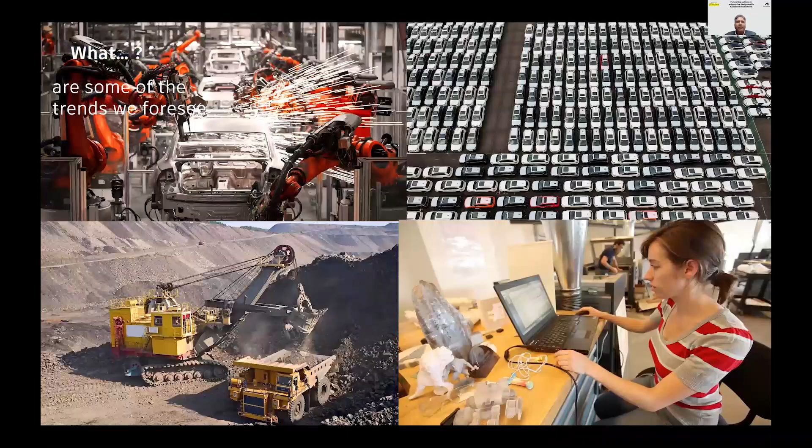So some of the whys will lead to some of the whats, the trends we foresee in the future. Climate change would lead to push for mitigation efforts. Governments around the globe are giving more incentives, providing tax sops to organizations and companies to make their employees buy electric vehicles, just to promote clean mobility. This is very important because the government is actually participating in ensuring that the population starts using vehicles which are not polluting.

A rise in urban population definitely would lead to a rise in consumption patterns. I discussed some of this in my previous talk, but I'd like to say that the desire to own a personal vehicle would continue, because more and more people would demand a personal vehicle, as for them it is like an expression of freedom and personality. So the desire for personal vehicles will remain.

Geopolitical factors are definitely very important, because every nation would like to stay ahead of the curve. They would like to own the solutions for clean mobility, because this is going to be very important going forward. But at the same time, it has the potential to create supply chain disruptions, which can also lead to many problems. But OEMs need to find ways to get around it.

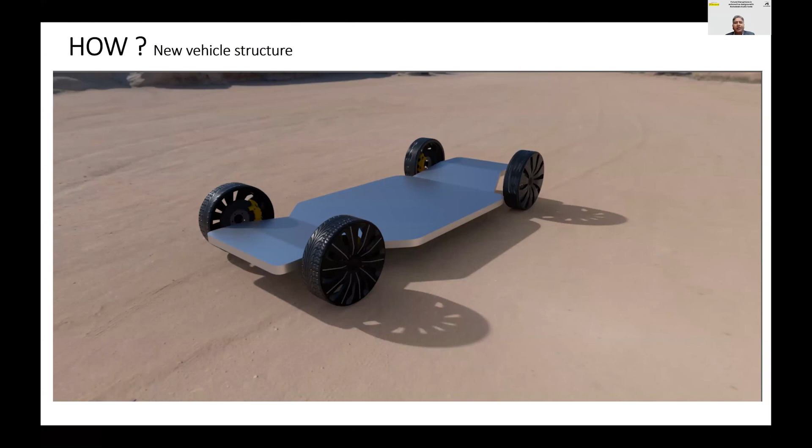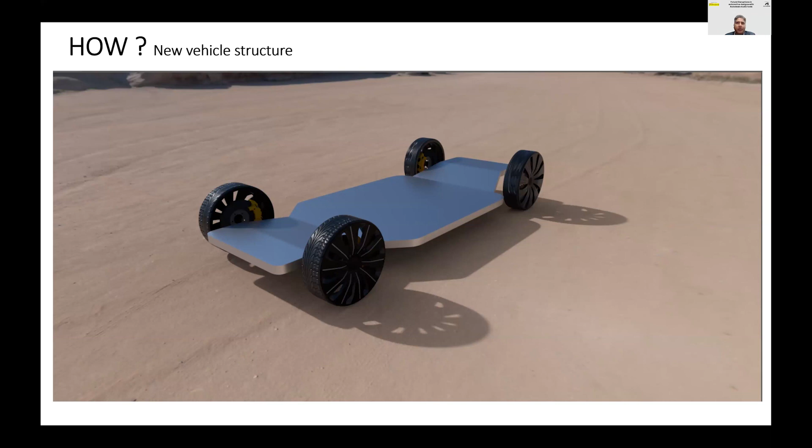Now the new electric motor gives a lot of room for designers to reinvent the shape and utilize the space available to them, because most components are thrown into the corners, which also gives a lot of room for interior space. So all the other elements like power transmission, cooling, fuel tank, and mechanical components have been removed because of this EV architecture, which gives a lot of opportunity.

So this is just an expression of how the vehicles could be, and this is not something that we are designing, but something that we just think is there. You can see that this vehicle has a lot of room. I'll just push forward.

With the new EV platforms, the number of mechanical components have been reduced, and most of the remaining components are pushed into the corners. This actually frees up a lot of space, gives more room inside, and reduces the vehicle footprint. This enables an opportunity for designers to focus on the interior as well.

Whatever electric vehicles are in the market now, and whatever will get launched in the near future, have very distinct aesthetic features, because OEMs themselves want to differentiate the EV from the ICE vehicle in the same family. Some trends we're seeing are very sharp corners, something futuristic, something akin to space shapes. Not exactly astronaut-related, but they want to excite consumers so they feel they're participating in something futuristic.

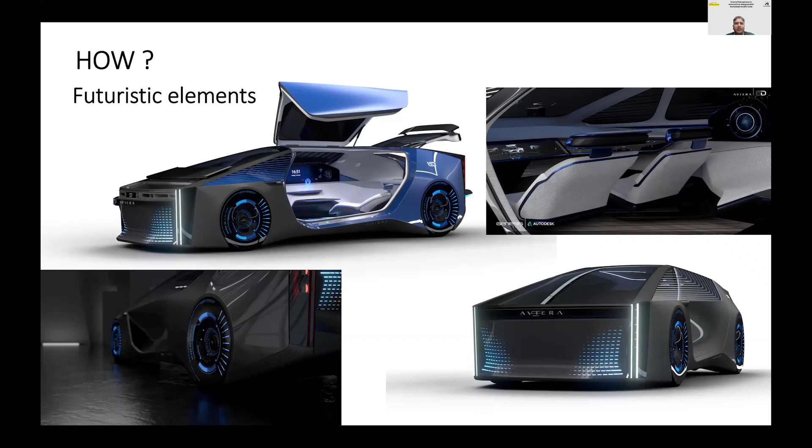Some examples, the same model but different angles, I've actually shared on this slide.

Another area where it's very obvious is that electric motors have very different cooling requirements compared to ICE based vehicles. So the space traditionally occupied by the radiator gets freed up. That's why in some of the new EVs coming out, the front has a bonnet but no engine, so you can actually put other things there.

There is a lot of creative ideas that could be explored. Also, since there is no grille, the front fascia becomes like a drawing board for designers. They can paint the picture like an open canvas, whatever they want, giving a very distinctive, futuristic look and feel to the electric vehicle at the front.

You could see some cars from the same family look very different because they have a very different front fascia and a very different look.

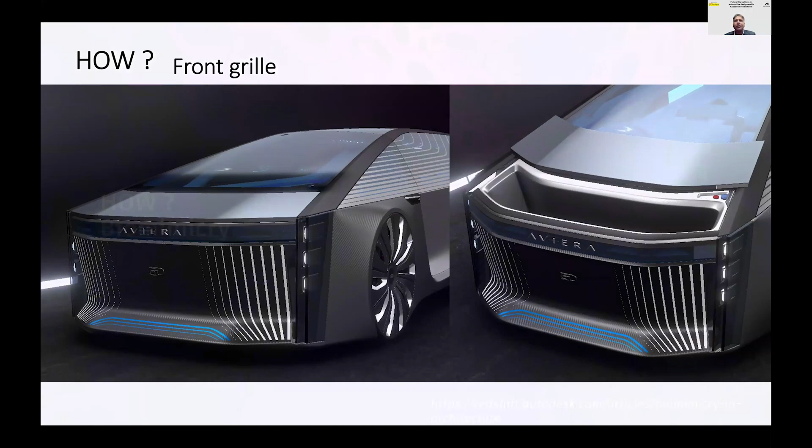As I mentioned in my initial fireside chat, the future would see tremendous resource scarcity because today we are consuming a lot of materials, elements, and stuff provided to us by Mother Earth. But these are finite things, and at some point we won't be able to access them because the resources would be depleted.

There could be a time where we need to find ways to sustain these mobility objects, and provide a lot of hope to others. In such times we need to ensure people consume vehicles in a manner which gives a lot of hope for the coming years.

In this context, we see that a lot of nature-inspired design would take center seat. Designers might include some natural design elements into their vehicle aesthetics.

This can happen through technology, which I'm going to discuss. This can help in multiple ways because it gives a very soothing, calming effect. At the same time, it's a way to respect Mother Nature and provide hope to others. But it also helps create differentiation and maintain the brand loyalty of loyal customers. So all these trends we can actually see going forward.

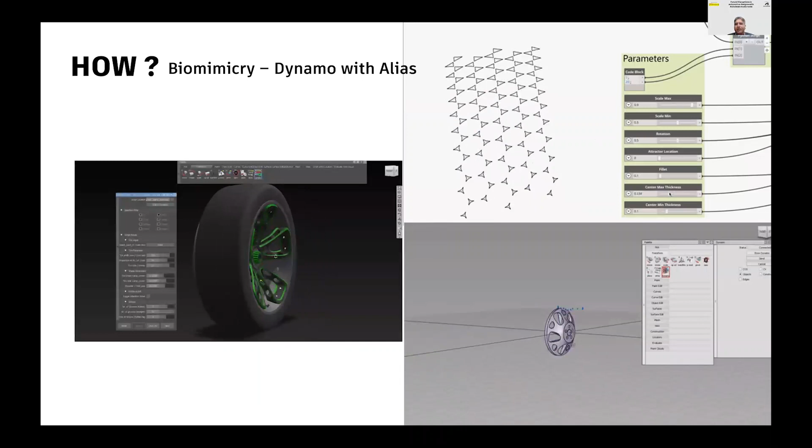There are certain technologies available within our tools, which is Alias, where complex designs could be achieved through the application of rule or algorithm. So it's not that you have to sit and design those patterns - those patterns will be given to the designers in the form of some algorithms or scripts, and those scripts can be called in while you are doing your vehicle design or surface design, enabling those parametric designs to be incorporated into your design.

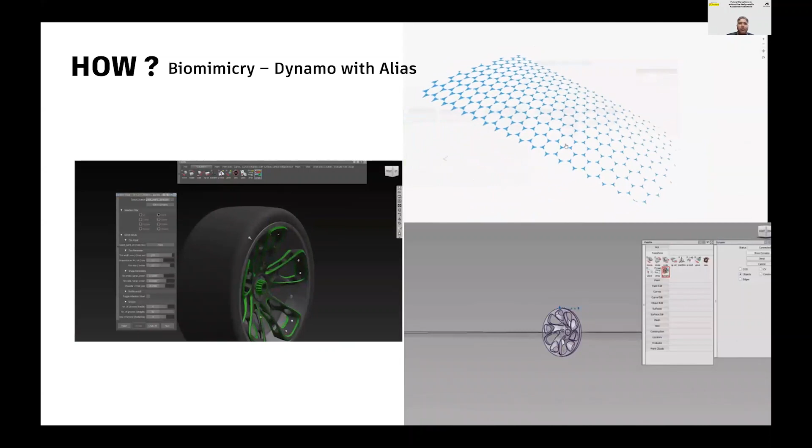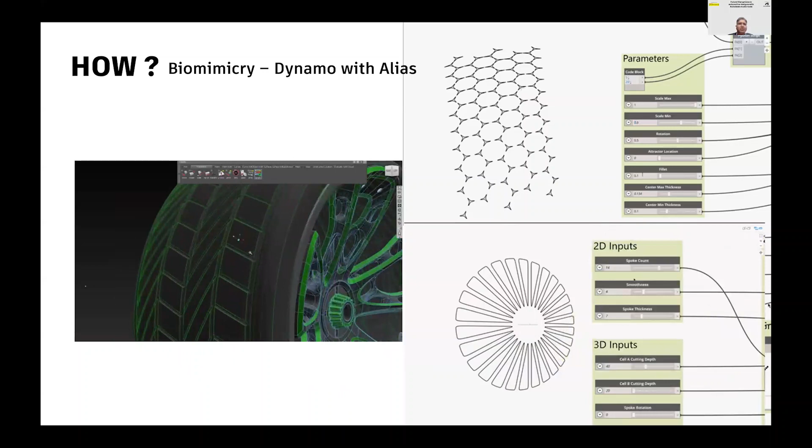So this tool which I've shown you is Dynamo, which is an open source visual programming tool, and it also works with other technologies from Autodesk, not just Alias. It's a computational design tool where designers can create scripts - or we don't expect designers to create scripts, because that's like someone else's job. Designers are more creative, so they can use or utilize scripts which are already written to create parametric design.

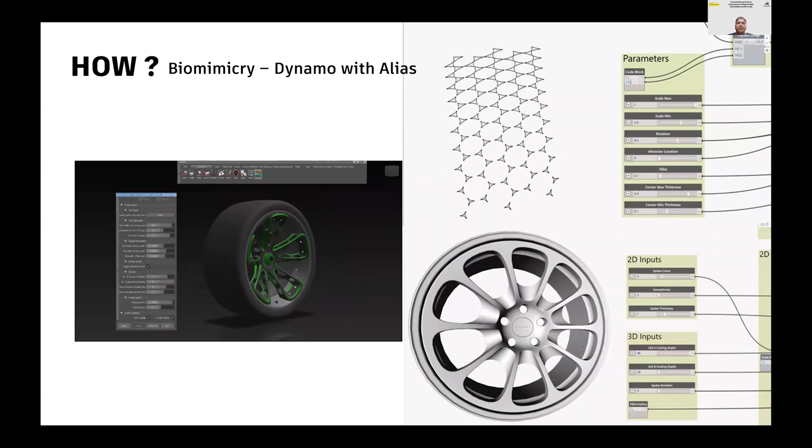Some of the very impactful designs have been created using this computational design technology.

And what we could also see, and this is one of the things we have already seen, is that too much technology can sometimes overwhelm the aesthetics of any mobility object. So if you just put a lot of technology, a lot of machines, a lot of components, many would think that it looks very mundane, very basic, and very simple.

But if you try to make it organic - the future might be that customers want to experience something which is very different, very organic, very chaotic. Sometimes we don't like chaos, but sometimes we like chaos because chaos can create some interest in your life. So at the same time, we ensure such designs could be there, but they remain flexible and functional.

So this is one example where one of our users leveraged Autodesk generative design technology - it's like a rule-based approach where you just provide the end result, the values that you desire, and the software would automatically create those values for you.

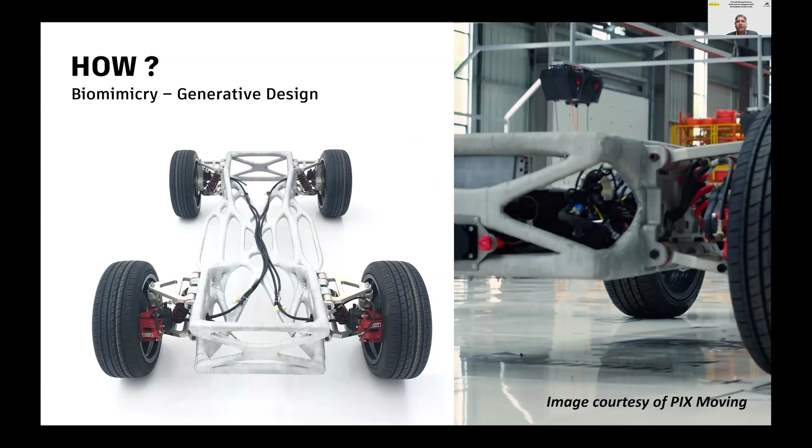This is one of the use cases published on our website - Pix Moving, a company that created a scalable and flexible vehicle platform known as PixBot. This PixBot isn't just for cars - you can actually put anything on it. It only sells the chassis, and it can suit various customers, because some would like to create a racing car, some a bus, some a small people mover. The possibilities are unlimited, and the flexibility the solution provides to the OEM is mind-boggling.

And this is something which is quite successful in terms of how we can actually foresee, or crystal ball gaze, the next phase.

One of the things I also mentioned is that even if AI gets too advanced in the future, it might not be able to capture the subjective notions of beauty and aesthetics, because beauty and aesthetics are very subjective and very personal. Something which you like might not be liked by another person. Beauty and aesthetics are one of the primary drivers of the buying decision of customers. So I would say that OEMs of the future and OEMs today will not compromise on vehicle aesthetics.

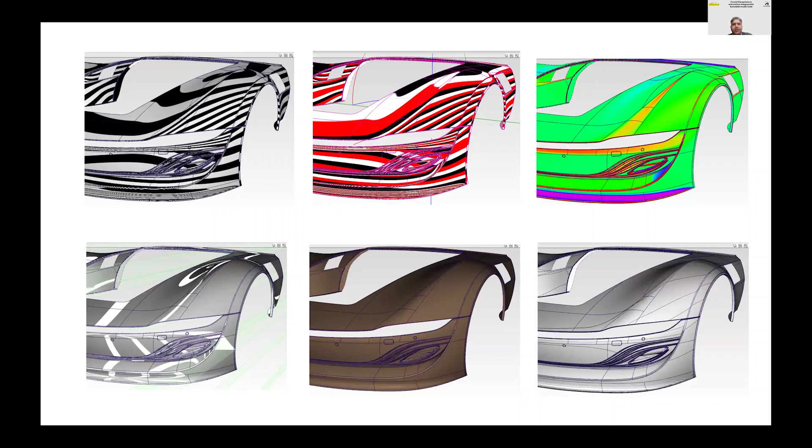So now that brings me to poll question number 2. Over to you, Autocar.

Can we have the results, please? Okay, so concept design and design visualization are the two leading areas where people think they are being aided by Autodesk tools.

Mr. Gupta, over to you. Thank you, Mayank. So we discussed the way Autodesk can help in the design process. Now we are going to discuss the way the products would be sold.

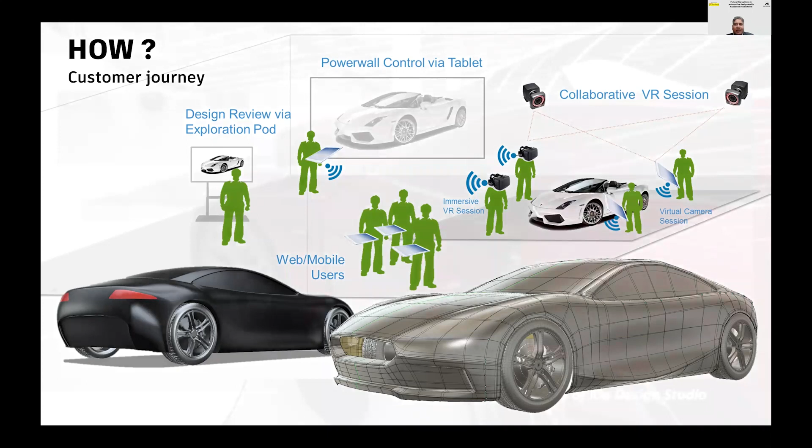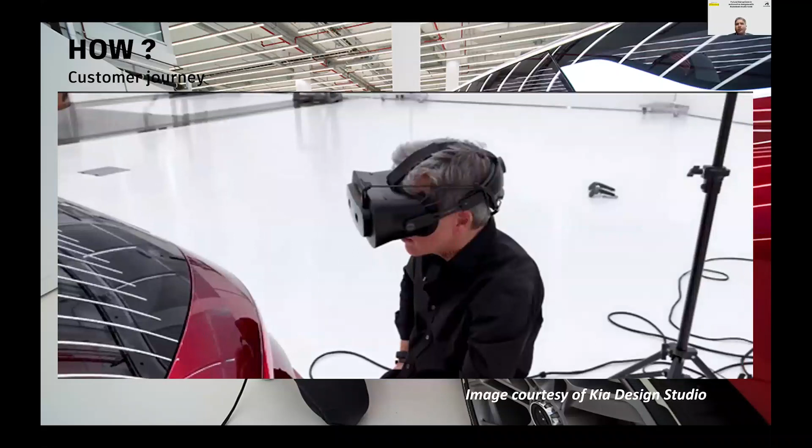I'd like to talk about how vehicles are being designed today. We already know about augmented and virtual reality, but with new extended reality technologies now available, it's a step towards merging the virtual and real world together. In this video, the red car is actually virtual, but everything else is real - the person, the shop floor, the Kia studio. Before, you were either in the virtual world or the real world. With extended reality, the two have actually merged.

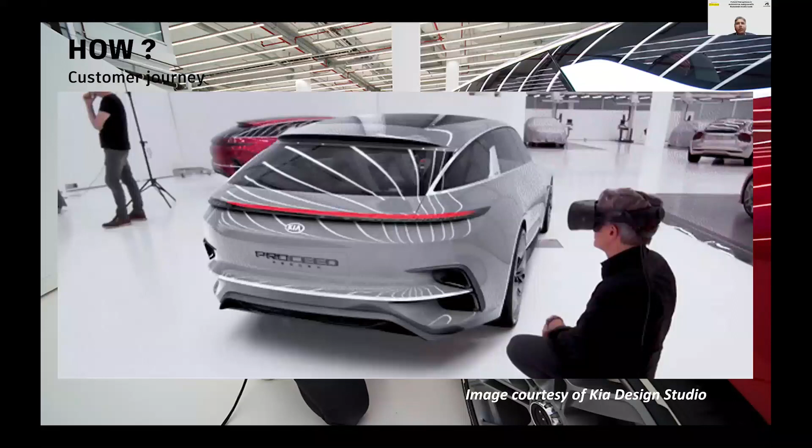Though presently this technology is only used in the design space, I reckon the days aren't far when such experiences will become normal and an inseparable part of the vehicle design process, because customers would like to check everything digitally, even if not physically, since digital models give more opportunities to explore more variants. That is where a lot of promise lies ahead.

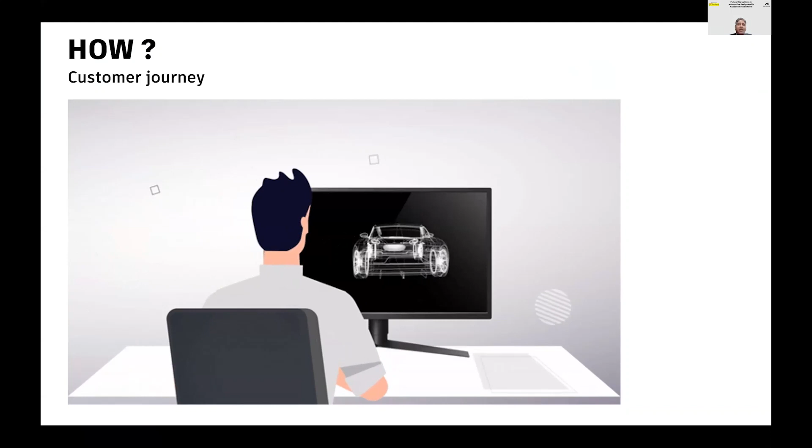Currently technology is limited to a certain set of people, but going forward it might become democratized. This is already there with our VRED set of tools - we have modules within our technology where you could deliver advanced renderings through server-based solutions, either on cloud or local server, made available through cloud API and streamed to any device - mobile, laptop, or a virtual reality session.

This can eliminate a lot of repetitive tasks, and you don't need to be a VRED expert or visualization expert to do that, because if scripts are already written and fed to the system, all the backend work can be handled by the machines and servers, and the final rendering can be given to the consumer making an informed decision. So collaboration and decision making can be streamlined and create a lot of value to the OEMs.

Let's talk about how vehicles would be used and how Autodesk could help in this space. Customers are getting a lot more finicky, with very unique sets of expectations, and this is going to be very challenging. So this one-size-fits-all approach might be shunned, and the customer's unique experiences and demands could be valued.

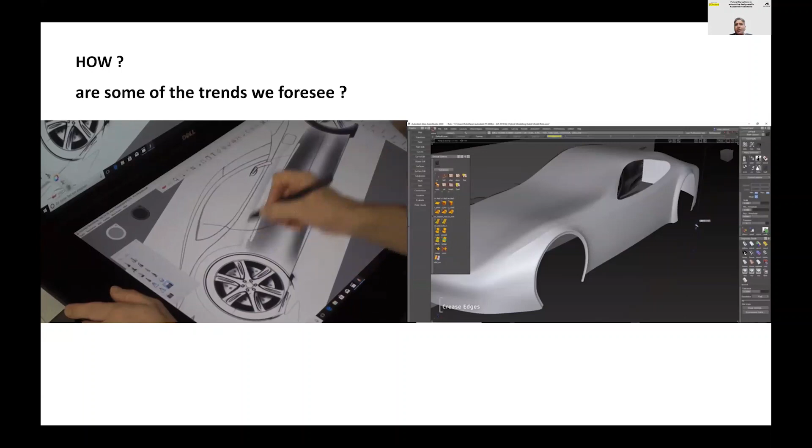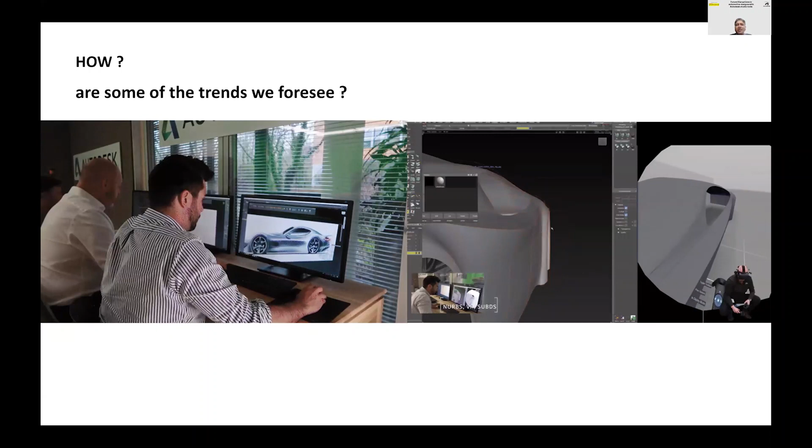So local craftsmanship would come into picture, and we need to have those contextual themes realized through local craftsmen. Manufacturers today are still thinking about it, but in the future they could think of a business model where they allow users or consumers to co-create elements or participate in the design journey. They could give them an opportunity to design something in free form, which can be made easily available to them, so that their needs, requirements, aesthetic requirements and aspirations could be captured much more easily.

So these are some of the tools that we already have to capture the design intent. For example, if you get something from the market, by doing an auto clinic, you could actually do something very quickly going forward.

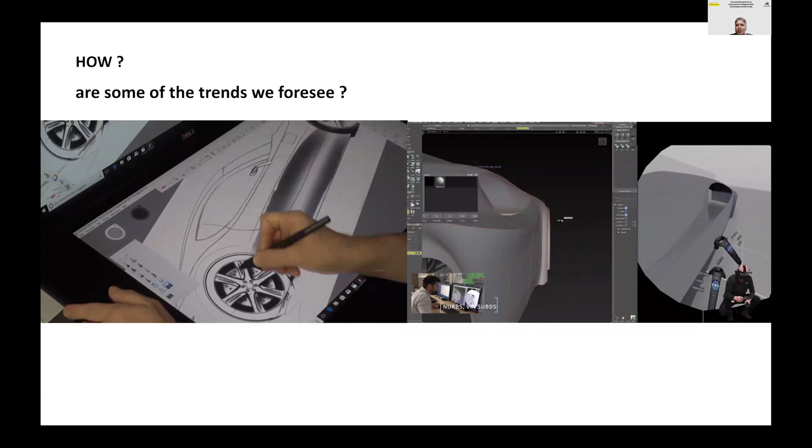Again, this is not something which can be mass produced. This was actually generated using our generative design technology in Fusion, but at the same time it was manufactured using 3D printing. So 3D printing is not yet mass produced, it's just for a limited set of components, but definitely it has the potential to create a lot of personalization for the vehicle.

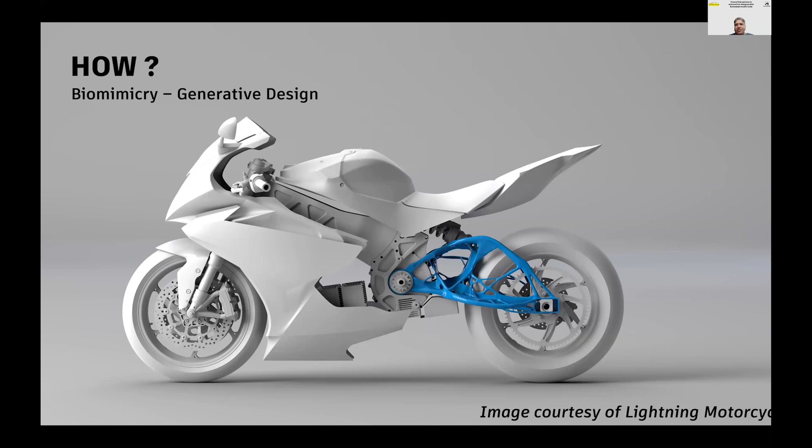Just two or three points more, and then I'll open for Q&A. As we see, tomorrow there'll be like 5 billion people living in cities. Definitely the cities would be choked, there'll be overcrowded cities, there'll be less space, and there could be a scenario where you don't have any houses to live in. I mean the future scenario could be such.

So it could happen that more and more people would like to spend time in their mobility objects. Right now I'm not calling it a car, because it might cease to exist as a car. It might be called a mobility object where it could double up as a living capsule. You could have an evening story or get-together with friends in your mobility object. As I said before, electric vehicles give an opportunity for more space inside, with a smaller footprint on the ground.

Which means you can utilize that space to create, say, a sort of table, and have drinks together, or eat together, or have coffee together. So all these opportunities are with the customer, and the design of interior spaces would be very, very important.

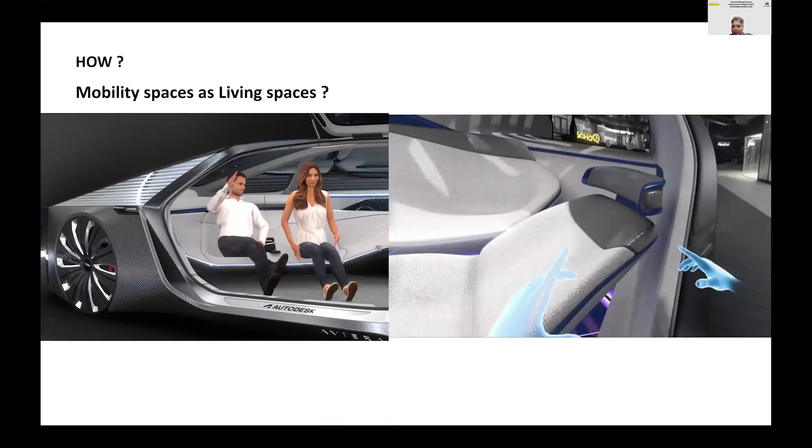And in this regard, we have technologies to support. In our visualization technologies, on the right hand video, there is certain upholstery which can actually be put in. You can create a lot of animations, you can show how to do certain operations in the digital format. So all these technologies would help designers design the vehicle of the future.

Again, going back, I think autonomous driving is something everyone is talking about, but I really don't know when it's going to be practically adopted. But once such a time comes, you have an opportunity to get rid of your entire dashboard. The dashboard could be moved somewhere else, giving you more interior space, and that interior space could double up as an oasis of entertainment and recreation, where you could just relax and watch a movie, listen to some music, and consume a lot of digital content. So in that regard, you will have a lot of opportunities.

So in terms of the experience, our solutions already support surrounding technologies, like the content generated in Qt Studio, which can be utilized to create those UX and UI graphic components.

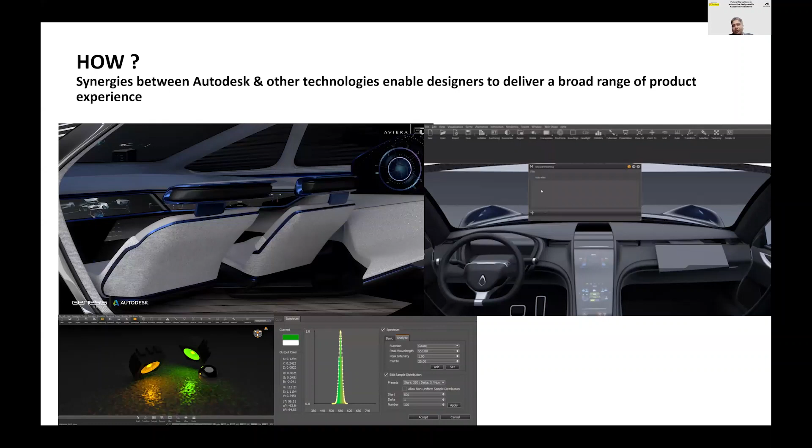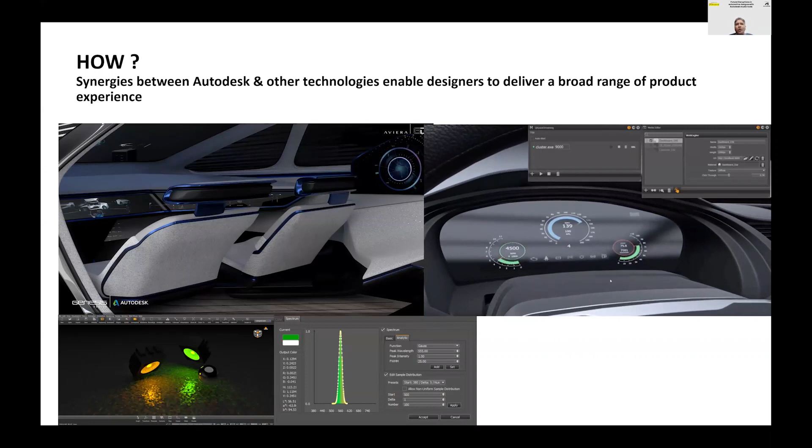You can actually use them. You can create them in other software, but you can import them and use within VRED. The lighting also provides a very good opportunity to create that experience—realistic lights which actually create or change the mood. All these things become very important, and our visualization solution, VRED, supports physically based accurate lighting to affect this. So in future there's a lot of opportunity.

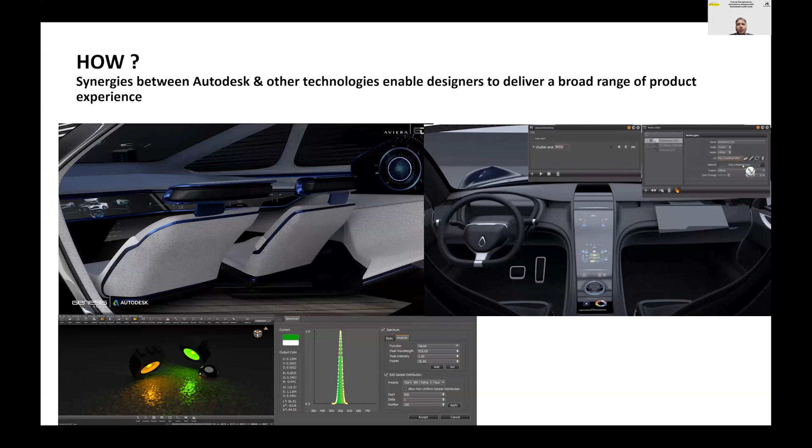Some of these things are already happening, if not in our geography, then in other parts of the world. But soon these things would come into our daily usage of mobility objects. So that concludes my presentation, Mayank, and I'll ask you to take the next poll question.